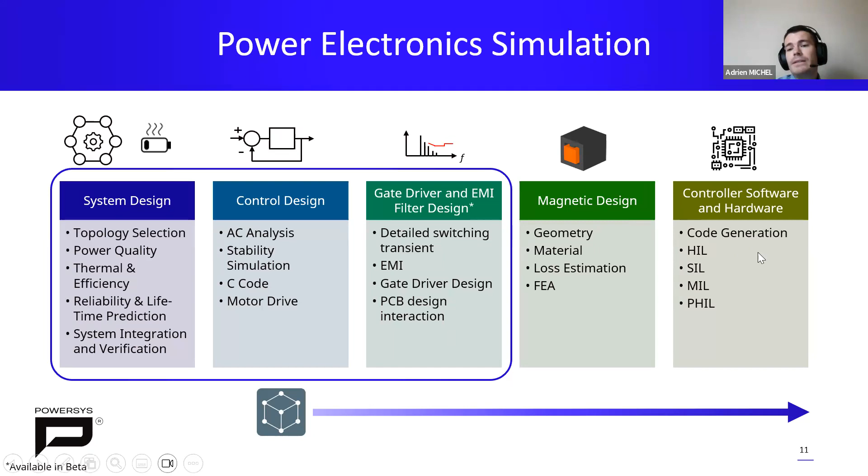But today, if you are focusing on system design, simulate quickly a topology, estimate the losses, the junction temperature, make any control loop, and calculate your EMI filters, you can do that with Simba. And we are good in this kind of process. And finally, we want to cover all, as you can see, the magnetics and this kind of real hardware simulation.

Also, as you may know, we have three ways to use Simba. The first one is to use the desktop version. So this is the graphical user interface that you can see here on the top of the screen. And this is one of the most common uses of Simba. So many people are going to download Simba from our website and they can just download the exe file, the application. You can launch it in your desktop, in your computer, and then you can start to build any circuit from scratch directly. This is the desktop version.

You have also the online version, which is linked to your browser. So you can go on Google and you can have access also to Simba if you want to simulate quickly some topologies as well. And you have the final one, which is one of the most important ones, which is a Python module. Because as you know, we have added the capability to Simba to be used with a Python interface. So it means you can build any circuit from scratch. You can simulate any circuit from Simba in Python. This is the API Python module.

So maybe most of you have already used it in order to perform a lot of powerful simulation, advanced simulation, and you can combine both the use of Simba desktop and Python in order to make a very powerful and amazing system. If you want to make some robust analysis, advanced analysis, if you want to emulate a kind of oscilloscope, if you want to use some predefined algorithm in Python in order to build and to calculate for you any controller, it is possible.

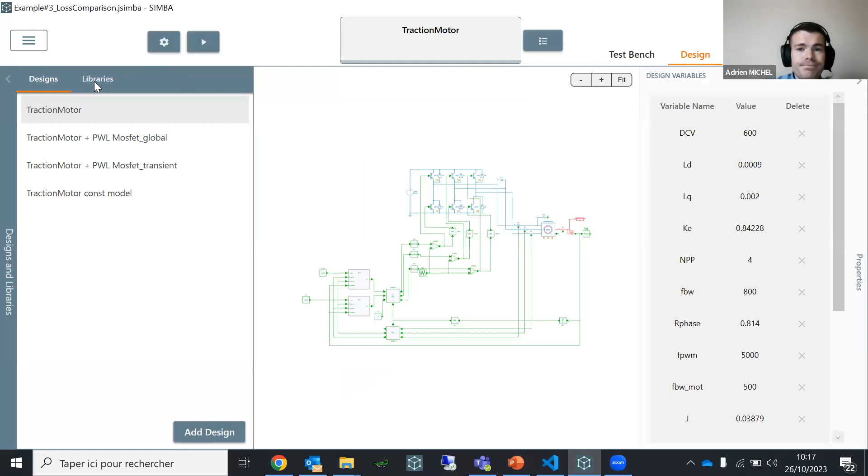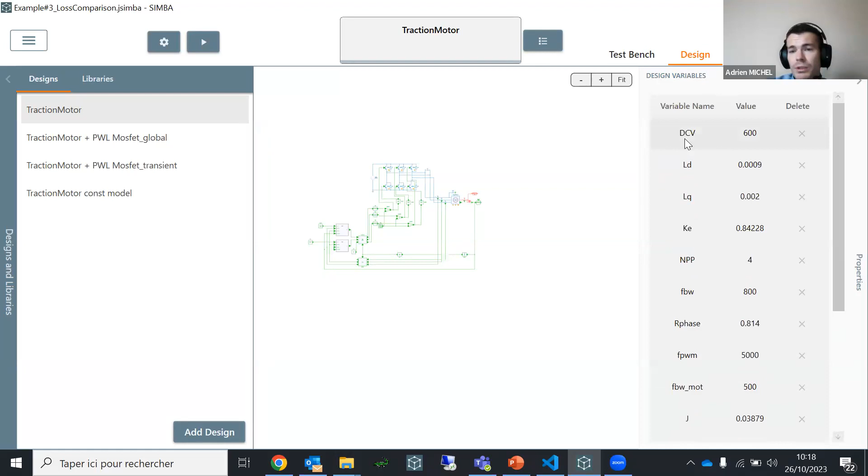Also, we have introduced the capability to use the parameter file as well. So you can now add a kind of txt file, and inside the txt file, you can define any parameters. So as you can see in this example, we have defined all the parameters with the design variable window. So you can introduce DCV, which is the input voltage of your system, and it is 600. But if you don't want to use this kind of panel in Simba, you can directly create a kind of txt file and put the path of this file.

And then Simba will read the file with all the variables defined inside it. Thanks to that, you can maybe make a kind of parametric simulation only by using this file and sweep a lot of different txt files as well. It's possible to do this kind of simulation. So basically, we have just defined variables inside subcircuits to better organize them. Okay.

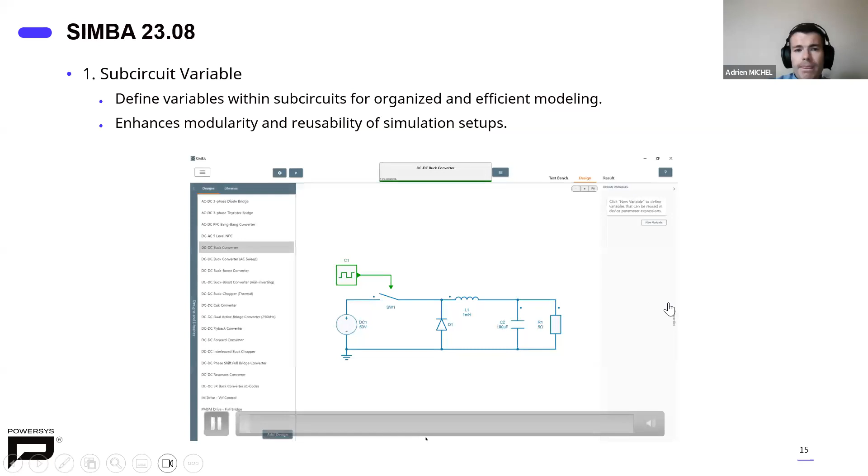Then we have also introduced the link between JMAG and Simba. So maybe most of you are working with mechanical teams because maybe you are focusing on motor drive simulation, and maybe your colleagues use JMAG itself or JMAG Express. This is the online version of JMAG, which is free. You can go on the JMAG website, create an account, and have access to JMAG Express in order to build your own, for example, PMSM and export this RT file, in order to use it later in Simba.

Or you can use JMAG, which is the 3D mechanical simulation software, build your own motor inside it, and use the JMAG-RT tool in order to extract the RT file.

So again, JMAG-RT allows you to build a kind of lookup table in order to take into account, as you can see, the total flux, the inductance value, the torque, the iron losses, and even more parameters could be used inside the JMAG-RT table. So the goal, in fact, is to build your own 3D mechanical super accurate motor in JMAG and to click on one button in order to export the same 3D motor, but it will be in a lookup table, 2D lookup table, as you can see here.

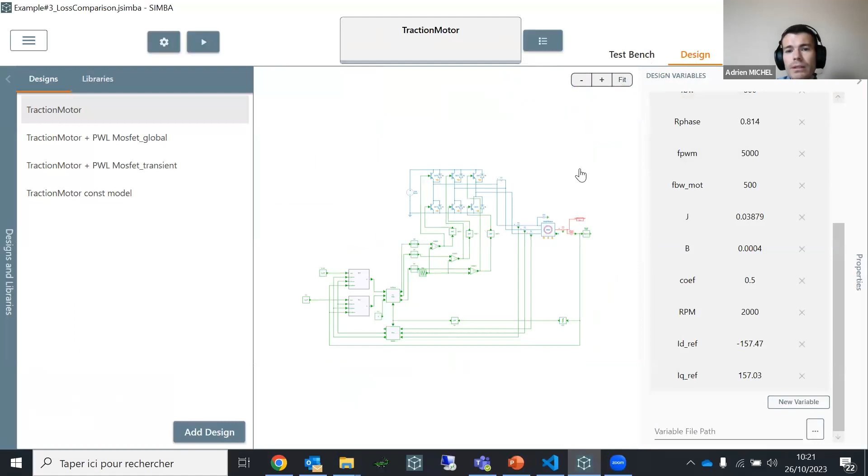So here, this is what I have shown you a few seconds ago. This is the PMSM example that I am talking about. We have just set up one inverter, actually, with an ideal model for now. And also you can compute the losses because we have the capability to compute the losses of your IGBTs directly from the ideal semiconductors model.

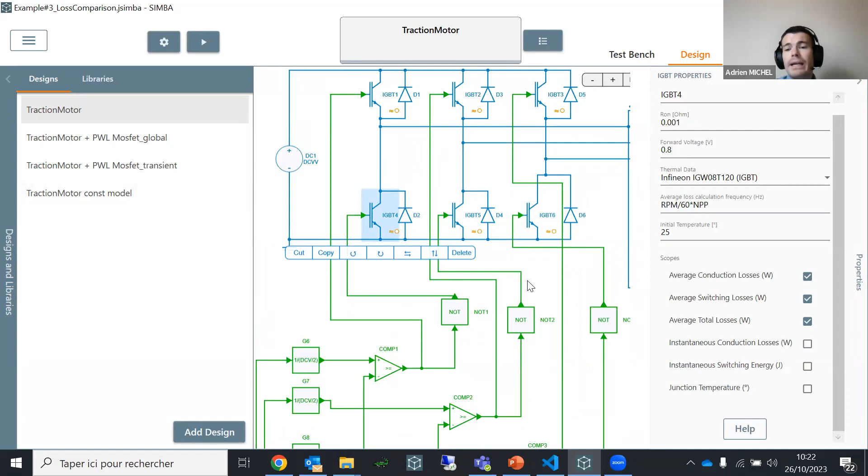Okay. And here, in that case, we have used a motor, a JMAG-RT motor, a PMSM1. And this file is, as you can see, coming from my computer, and this is in fact an RTT file. This is the extension provided by JMAG-RT when you generate your lookup table with real data. And then all the control stage has been done with the ID, IQ reference in order to create VD and VQ signals, and then build your own PWM signal in order to turn on and turn off your semiconductors.

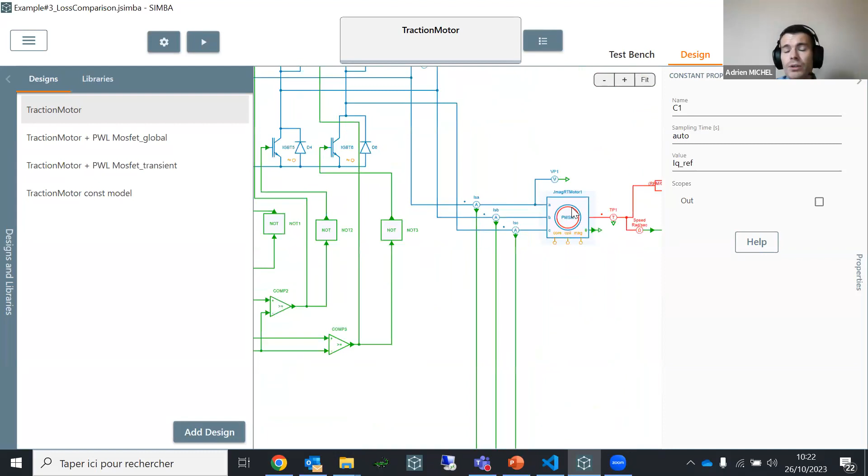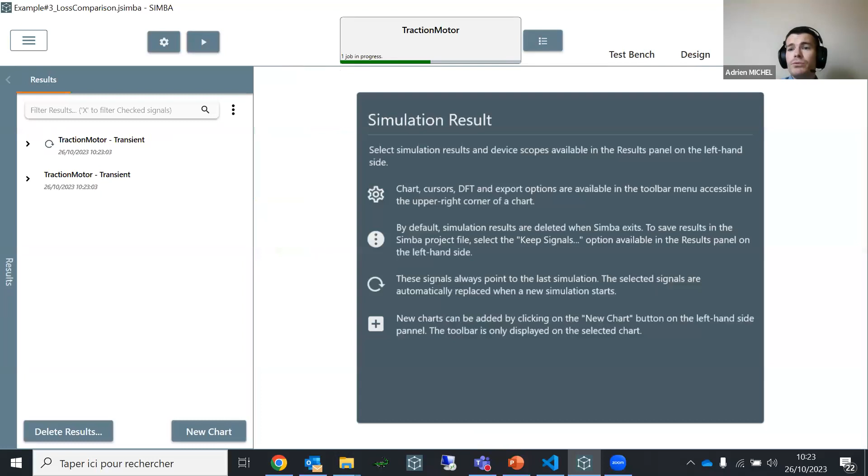Okay, so this is a basic motor drive simulation that you can do, but now you don't need to use an ideal model. You can do that with an ideal PMSM, but now you can use a real JMAG-RT model. And you can click on this simulate button, and as you can see, the simulation is quite fast. And in the meantime, you can go into the result tab and you can observe directly all the scopes which have been enabled during the simulation.

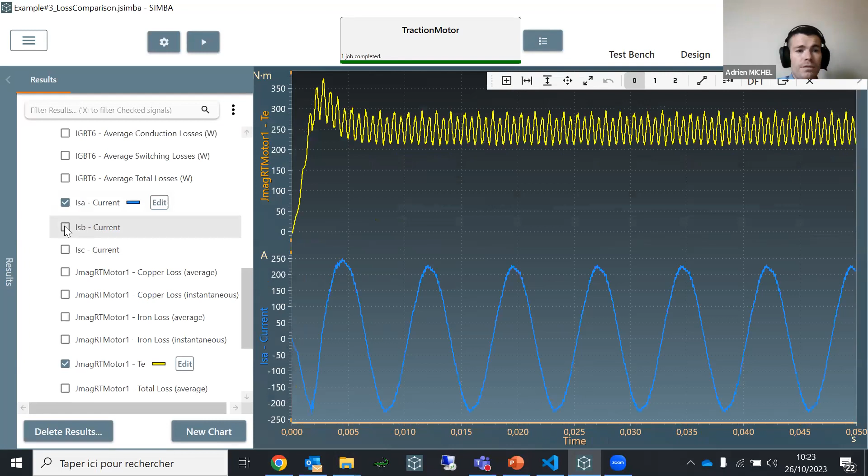So for example, here I can check the torque. Okay, so this is the torque produced by the motor. You can also check the current, three-phase inverter currents, which are feeding the motor directly here. You can also, if you prefer, add a new chart and add the current inside the chart directly here. You can make a quick zoom and understand directly the ripple, the ringing, and so on. Okay, so you can check this kind of behavior.

You can check the torque, and as you can see, the torque has a non-linear behavior. Why? Because the JMAG-RT model is a non-linear one. It is a real model. So of course, the non-linearity will be there. So this is what you can do now with JMAG.

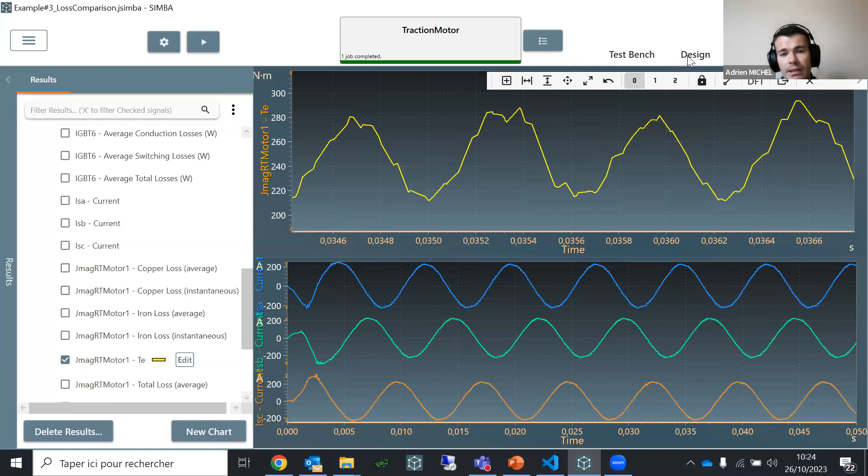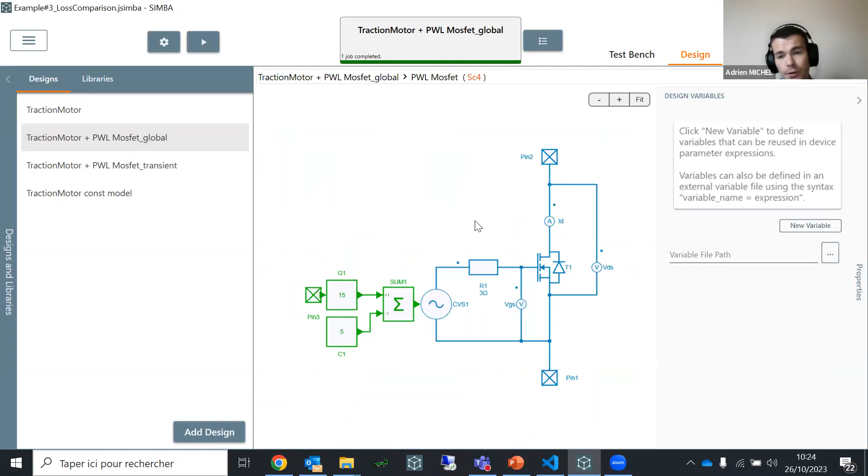And then this is the next step of the webinar, and the main step is to use real semiconductors. And inside the next simulation, this one, I use a real MOSFET in order to get the real behavior of your inverter, and also the real model of your PMSM. So in that case, now you don't need to use the JMAG-RT model with ideal. You can now use a real detailed MOSFET inside Simba plus a real motor model in order to have a full real simulation. And this is the main goal of this simulation.

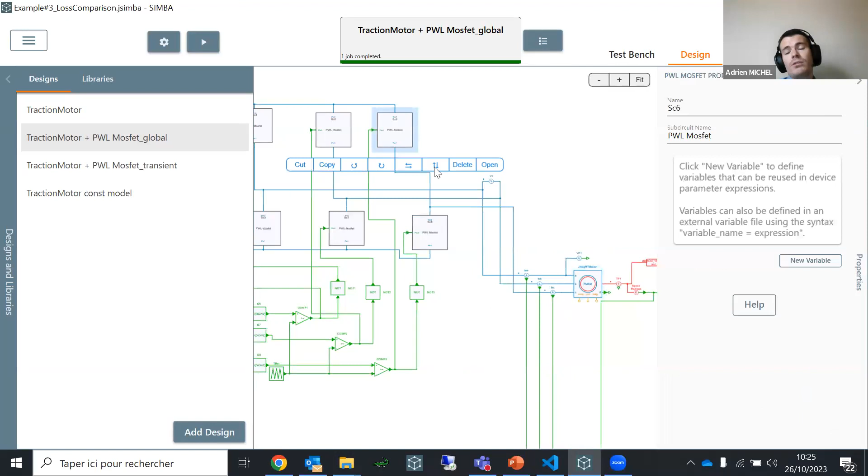But I am going to introduce the real detailed MOSFET soon. But here it was just to show you that it is not restricted to an ideal semiconductor model plus motor. You can do both real semiconductors and real mechanical things. And you can compute the full and total efficiency map of your drive, as you can see on the screen at the bottom here.

Also, one new feature is the capability to compute faster the stop at steady state function. As you know, in Simba, you have the capability to define an end time. Okay, so maybe you want to simulate maybe 50 milliseconds.

But if you don't know how much time it will take to simulate, in that case, you can click on this handy button, stop at steady state, which was already created a few years ago. Okay, this stop at steady state is not a new feature, it was already there. And the simulation will stop itself when the steady state is detected. In that case, you don't need to take care about which end time you need to put.

But the new features which have been added are the base frequency, the number of base periods, and the save initial point. So, for example, if you use the base period, these parameters will help the algorithm to detect easily and in a faster way the stop at steady state. I will show you that.

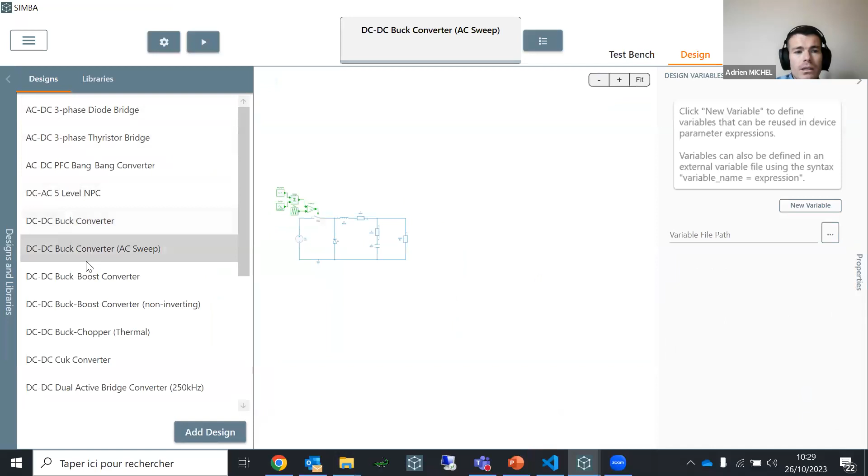So I can show you quickly one example. So I can just click on Start window. It will just open a new welcome page of Simba. You can click on Design Example. You can click on Buck like this. You can see you can simulate during 20 milliseconds. You can check the output voltage, which is directly here.

You can decide now to stop the simulation at steady state. In that case, as you can see, it is not 20 milliseconds. Okay, so you can directly retrieve the first simulation, which was the 20 milliseconds. Now this is with the stop at steady state, and the switching frequency of my buck is 5K. So you can decide to set, okay, the base frequency to 5K or 5,000, let's say, it's the same.

And now, as you can see, we have the new simulation time, which has been directly provided here. Okay, and basically you can also provide maybe the three last periods to observe, and now you can simulate, and you can see now the three last periods of your system.

Okay, so if you don't put that, in that case, you can just put it like this, and you will see that with the 5K frequency, the steady state has been detected at this point. And this point was just with the first 20 milliseconds. Okay, so if you use these parameters, it will just help the system to find the steady state sooner.

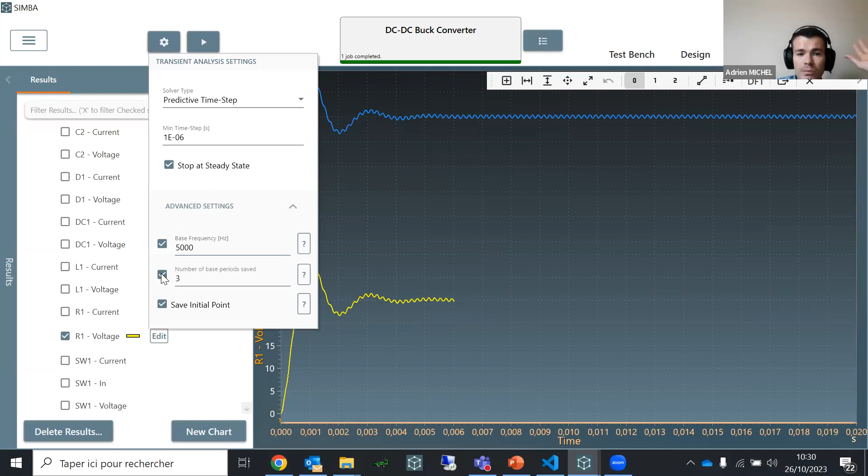And if you want to display only the three last periods, like this, in that case, I can just stop. And here you can see the three last periods of your steady state.

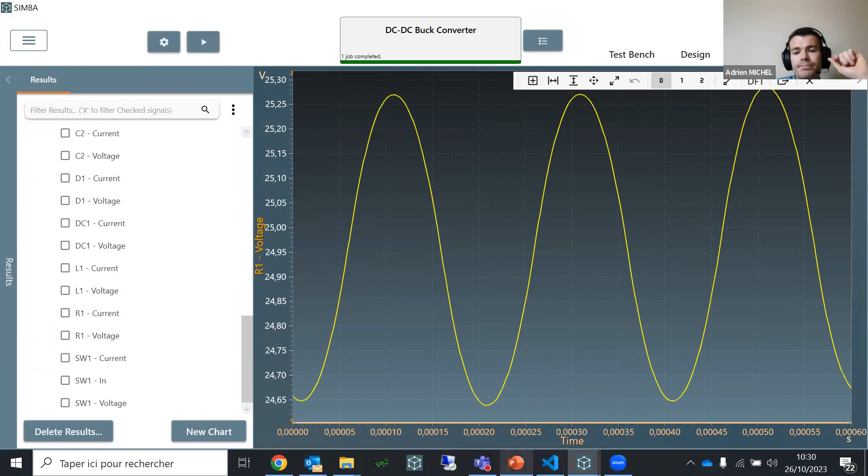And we have also added some very interesting functions, like if you want to use drag and drop, you don't need to click on plus. When you select your component, you can just drag and drop it. If you double click on any of your jsimba files, Simba will be opened automatically. So the association between Simba and the jsimba project file has been done.

We have an auto backup function. It means if your computer crashes for any reason, you can just retrieve your last simulation with the last parameters that you have configured. So you will not lose everything, basically. And we have added a lot of new blocks, as you can see here, if you want to, again, perform more simulations.

And the main milestone, the main topic of this new release, is the release of new detailed diode and MOSFET models for switching transient behavior. So the goal, in fact, is to be as accurate as possible to reality. So based on that, we think that the datasheet of the manufacturer who provides any semiconductors is in fact what we need to rely on in order to make something accurate.

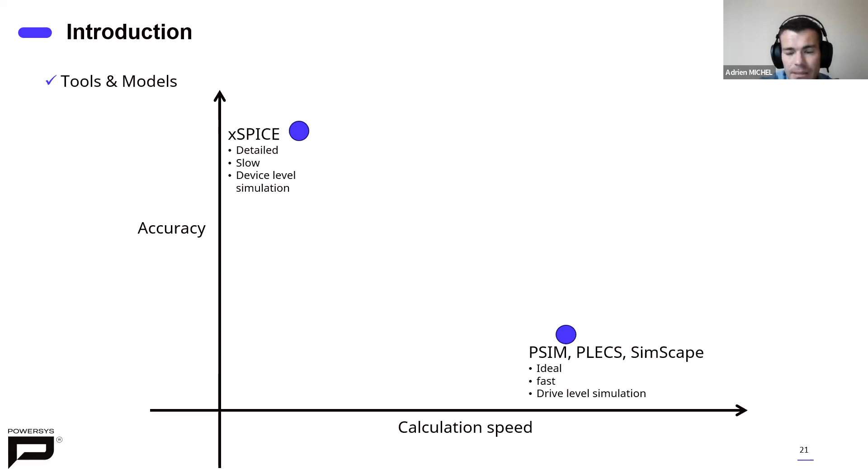But sometimes if you want to go fast and you don't care so much about a real model, you can use an ideal or quasi-ideal simulation software like PSIM, PLECS, Simscape, and some others. So this trade-off, in fact, is a real pain for you because each time you need to use two simulation software. You need to reproduce one circuit from one software into another one. It will take some time. It can also lead to some human errors or to some issues between each solver. And at the end, it is not really convenient to work in two different software.

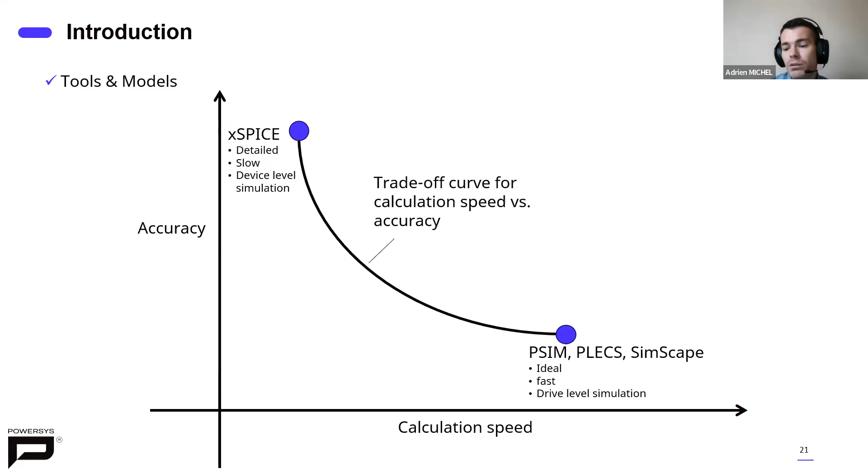Also, if you have a big team and everyone needs to work in two simulation software, it is completely not convenient. And our goal with SIMBA is to combine both accuracy and calculation speed. So actually, you can use SIMBA for ideal simulation, for system level simulation, and it will use ideal models. And you can use, of course, thermal data, thermal lookup tables that you can import directly from the semiconductor manufacturer. But now you can use our detailed model. It is called SPICE-like, a detailed model in order to be as accurate as possible as SPICE.

So again, SPICE is not always accurate. And this is why we have added two possibilities. One is to use the datasheet information, to scan the datasheet in order to represent the real transient and static behavior. And the other is to use SPICE netlist models inside SIMBA. And it is SPICE-like because we have built an algorithm in order to reuse and recalculate SPICE netlist parameters inside SIMBA in order to be as accurate as possible as SPICE.

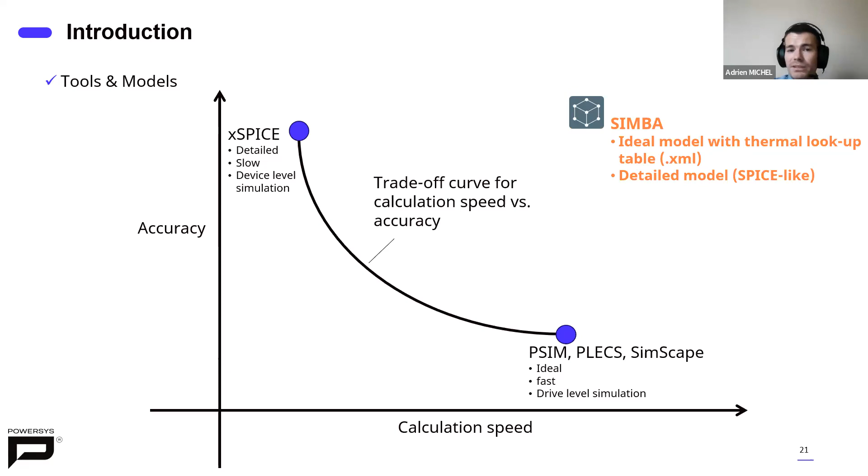So now SIMBA combines both device level simulation and system level simulation. And this is what we have done for this new semiconductor model. So the goal is to capture the switching and the static characteristics with a precise, super fast, and ideal model, and they are used, in fact, in extensive iterative calculation. For example, if you want to use Python, you can sweep 1,000 semiconductors and check the influence of the parameters on your simulation.

And again, everything will always be with the same solver. You don't have to change between SIMBA solver or SPICE solver. It is not working like this. It is always the SIMBA solver, but the way we have built those models will be really, really fast. And I am going to show you this. So the process is quite easy.

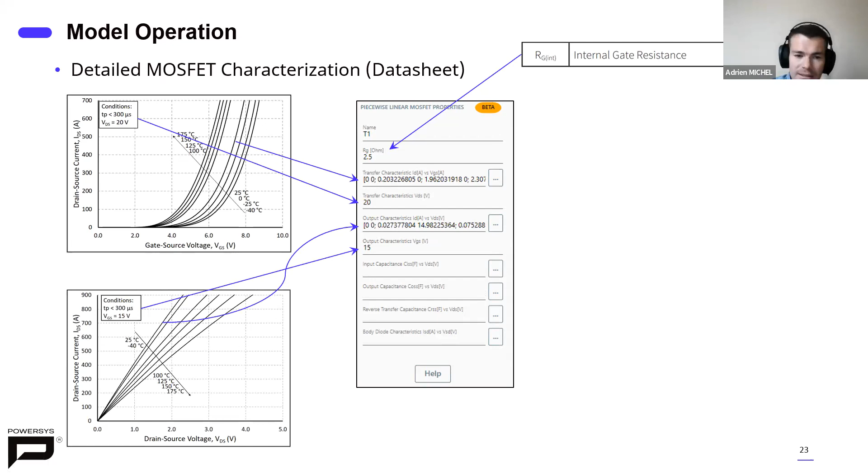For the MOSFET, you need to fill in the gate resistance value. So you can just open the datasheet and get the value. Then you need to put the transfer characteristic, for example, ID versus VGS, at one transfer characteristic value, for example, for VDS equal to 20. Then you also need to put one output characteristic, ID versus VDS, for one VGS value. You can choose any VGS value and any output characteristic, but only one needs to be filled in inside the table here. And then SIMBA will do all the process for you.

You need to put also the nonlinear capacitance, you know, CISS, COSS, and CRSS versus VDS, those typical curves. You can just scan it or import a CSV file. And the last one is the body diode that you need to fill in, the body diode curve, as you can see in the fourth quadrant.

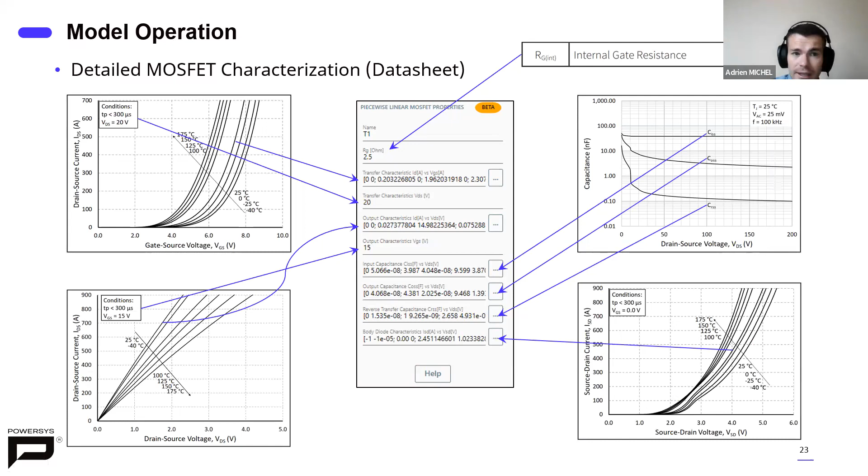Once you have done that, your detailed model is characterized, and you can start to run it. And here you can check the internal model of our detailed MOSFET. We have introduced some nonlinear capacitance. We have also introduced a body diode, a real detailed diode as well. We have put the gate resistance. You can see here the nonlinear capacitance, the mathematics.

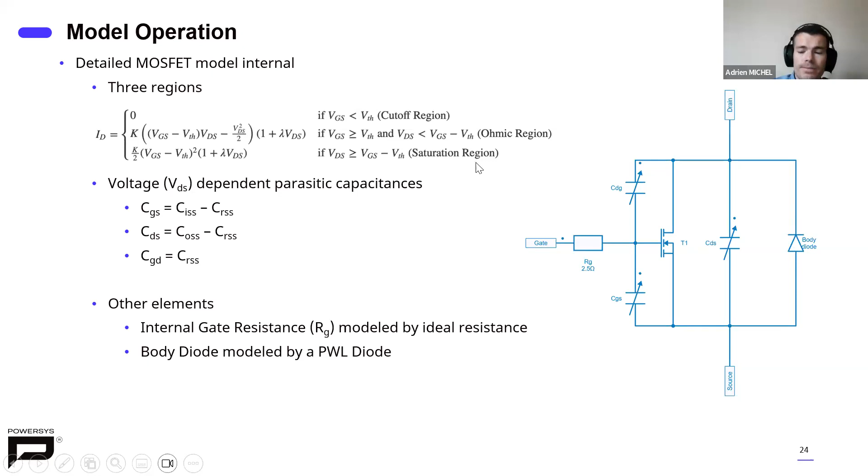And here, this is the inherent calculation of the MOSFET in cutoff region, ohmic region, and saturation. We have built and used a kind of algorithm which can help you detect the main MOSFET channel parameters in order to calculate automatically those three parameters, VTH, K, and lambda. And then Simba will use those parameters to compute the switching and the transient behavior.

And as you may know, those parameters are most of the time used in SPICE as well. So we can also extract those parameters from SPICE and put them inside Simba in order to reproduce the same behavior as SPICE. So basically, you have the choice to use the MOSFET model from the datasheet. You just need to use those characteristics, and Simba will do it. We do everything automatically.

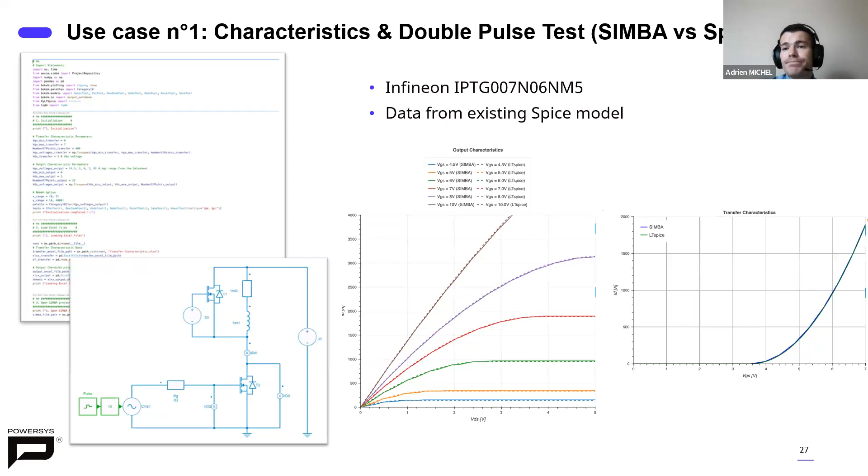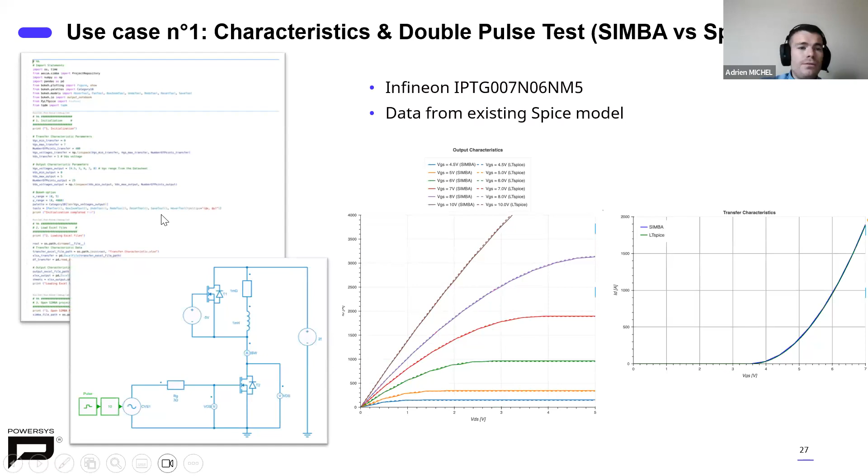So if, for example, you want to use a SPICE model, and you use one SPICE simulation software and another simulation software for your system level simulation, and you think it is really a pain to reproduce everything in two different simulation software and lose time, you will need to use Simba, because Simba will do that for you.

So I can directly open the Python script, because Simba is compatible with Python. We have built this Python script, which is not too long, only 200 lines. If you run this script step by step, we compute and simulate this double pulse test. The Simba simulation will be done automatically. It will be initialized. We also import some datasheet values, and we merge both results, one from Simba and one from the datasheet. I think it takes some time because I am in Zoom.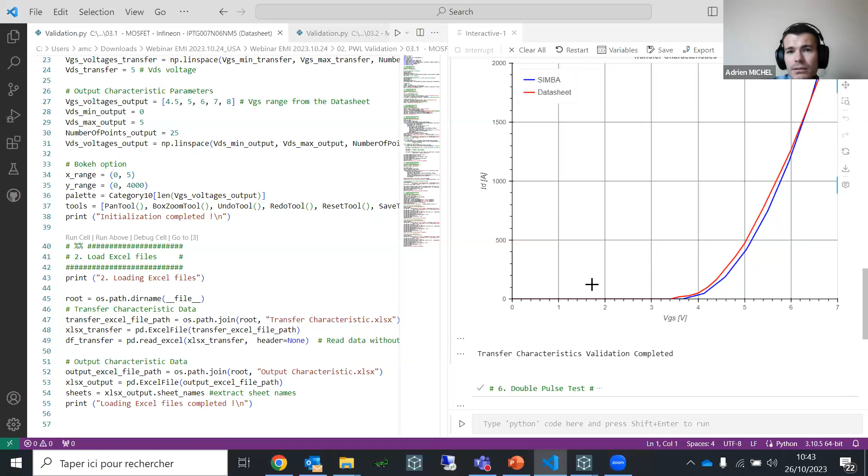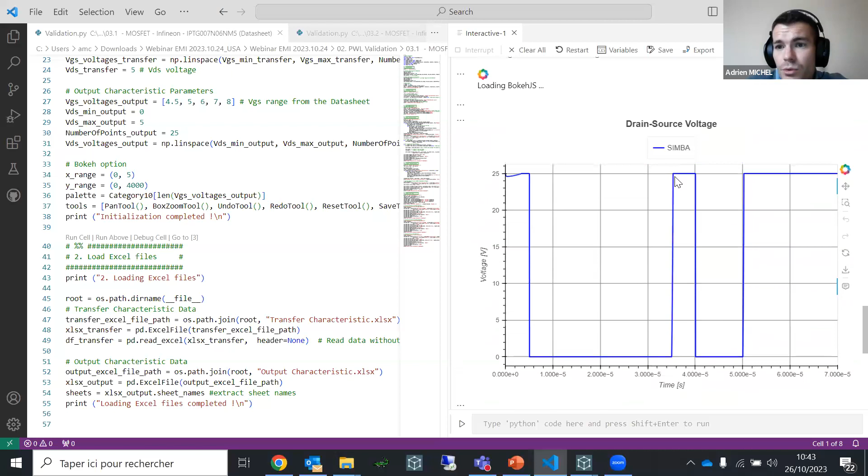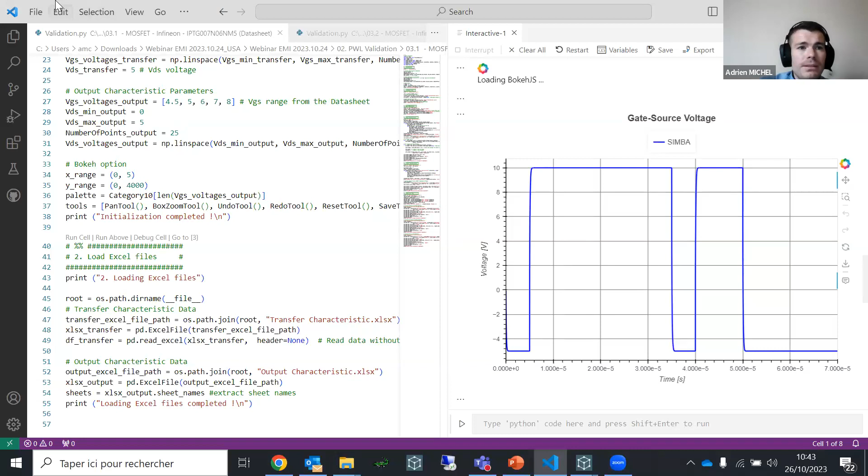It will show you the rest. It takes just a few seconds. And here you can see the drain current, the drain source voltage and the gate source voltage, the result of the double pulse test. And now I can close this interactive window and resimulate the same thing.

Okay, yeah, between Simba, because we have introduced the SPICE detailed model with the SPICE VDMOS features. And we are going to compare this new model versus SPICE simulation. So again, we have run the LT-SPICE simulation. We have exported the result because you can use the LT-SPICE library in Python. You can use our Simba Python library, and you can combine both in order to compute, and as you can see, we have set up 900 simulations in less than 13 seconds. So with Python, it is extremely fast.

And you can see now the result between Simba, this is the solid curve, and the dashed curve, which is the LT-SPICE. So as you can see, we are matching perfectly. We have the same characteristics, ID versus VGS, it is the same. So I can zoom, click on this zoom, and you can see the results, which are very, very close.

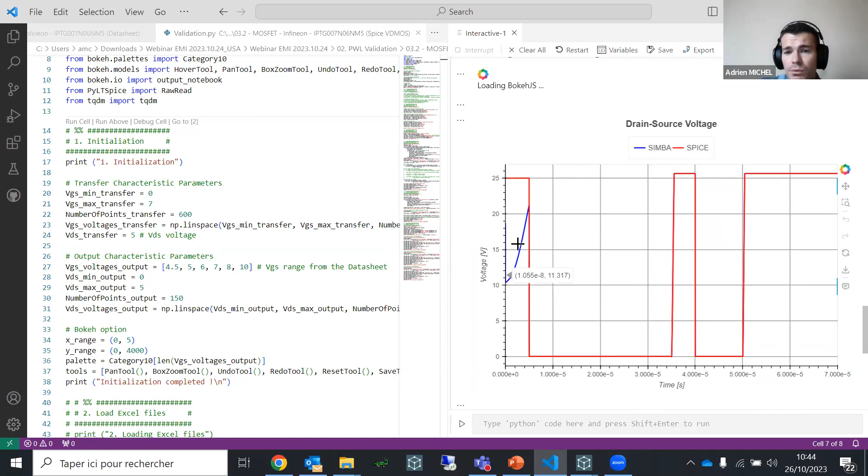You can see the gate voltage, the drain source voltage again. So here we have just made a different initialization. This is why we have different values here, just for the initialization. And the drain current as well, which are very much the same. I need to zoom, and you can see the result between both.

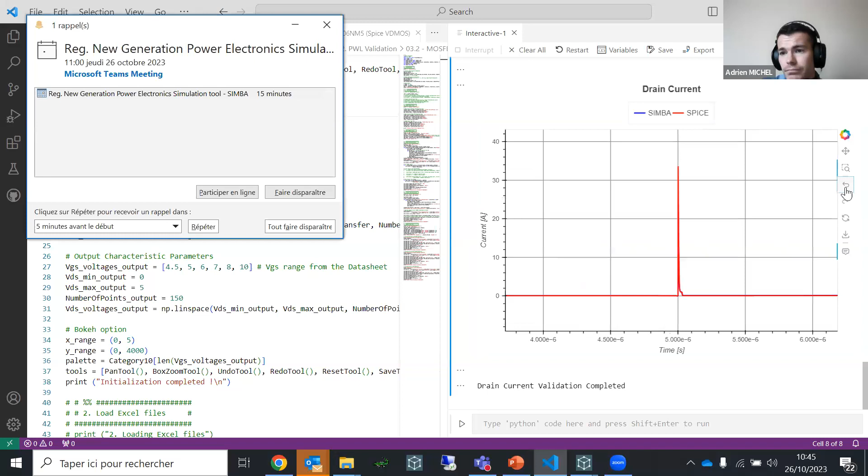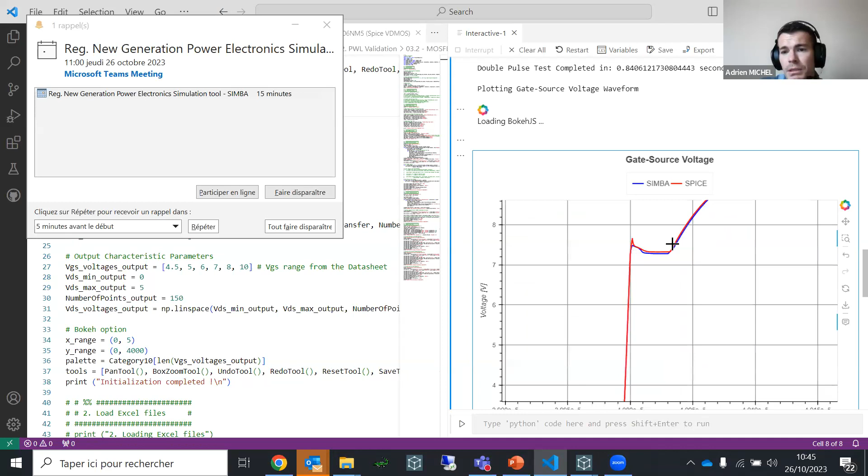And one thing I forgot is to show you the Miller plateau, which is just there. And you can see now the Miller plateau between Simba and SPICE with our new detailed model based on SPICE parameters. So basically, you have the choice to use a detailed MOSFET based on the datasheet, which will give you the same accuracy as the datasheet, or if you prefer to rely on a SPICE model because you work with SPICE, in that case, you can use our SPICE VDMOS.

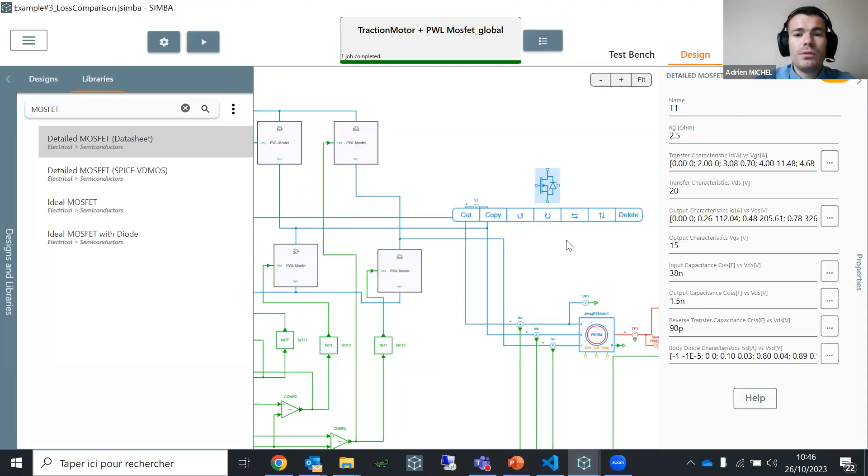And this result is, in fact, what I have shown you just there in this Python script. And the first Python script was the same simulation, but we used this detailed MOSFET based on the datasheet where you need to scan all the characteristics: non-linear capacitance, ID, VGS, VDS, and so on. So now you can use Simba for this kind of real simulation if you want, or you can use it also for system level simulation as well. You have both capabilities.

So now I am going to give the ball to my colleague Anup. Then he can introduce you the other test case that we have done in order to show you how it works. So Anup, I will just stop sharing my screen and you can continue. Thank you, Adrien. So I'll share my screen.

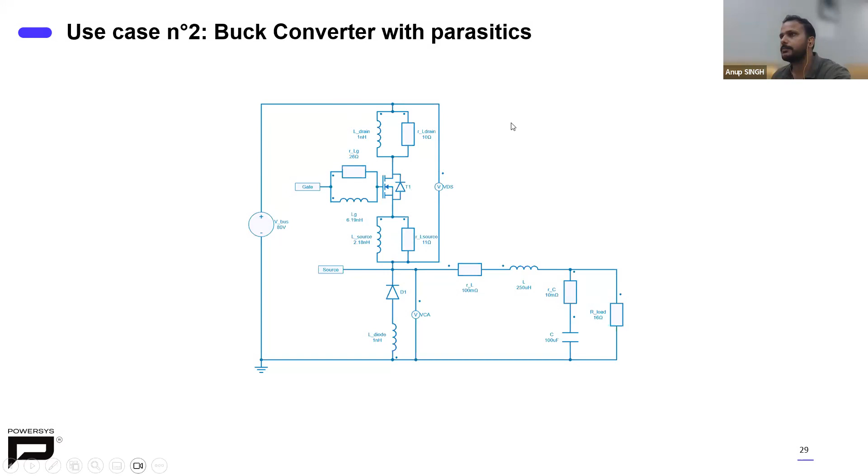Okay, I'll brief you about the two test cases on which I have used the detailed models. The first one is the buck converter. So I'll directly open the model to show how you can model using the detailed device. So here you can see this is a buck converter, which is first made with ideal components, and then we have introduced some parasitics into this, and this is also with ideal semiconductor models. Then after that, here I have replaced the models with the detailed models. Actually, this example was done by my colleague Carol in the US.

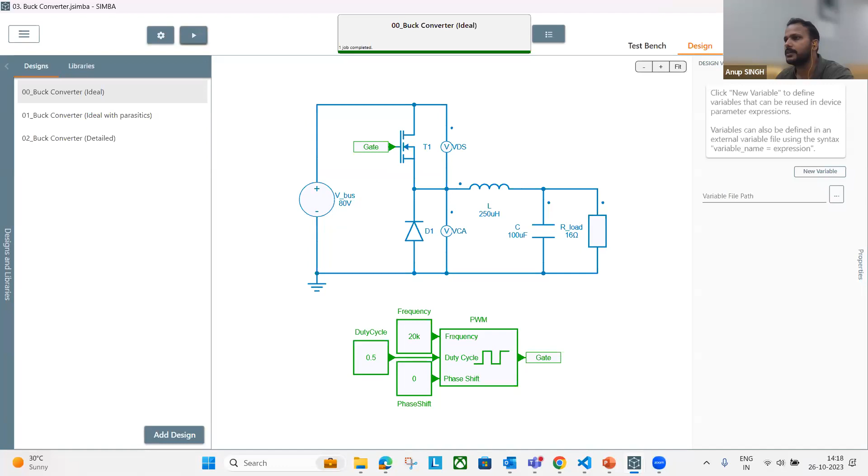So yeah, this is done. So I'll just simulate these models and we can see the difference directly. So you can see this is completed. So here you can see the ideal model. I'll look into the inductor current and then VDS. So here you can see, first of all, it is in DCM till it gets stabilized, and then into continuous conduction mode. Okay, so this is with all the ideal switches.

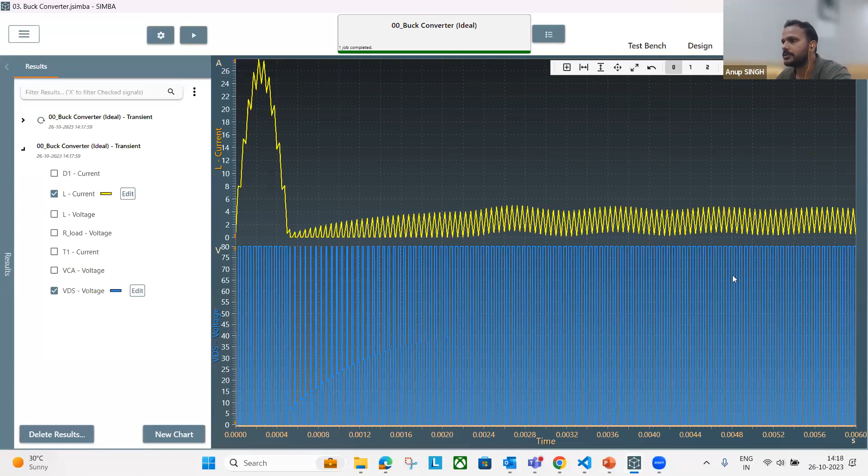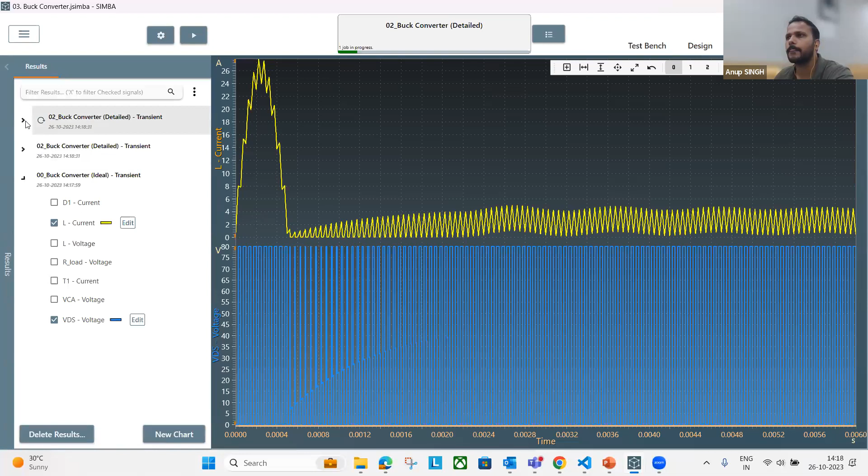Now I'll just run this buck converter with the detailed model. Okay, so if I run this, wait, yep. So I'll take a new window. VDS, yes. So here you can see, till it is in discontinuous mode, if I zoom it, okay. And then here you can see the ringing effect very well, which is due to the parasitics that you have added and the detailed device models.

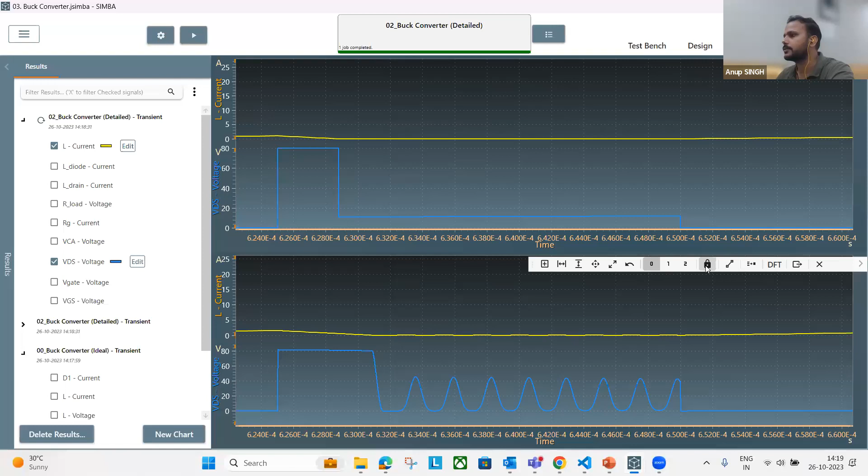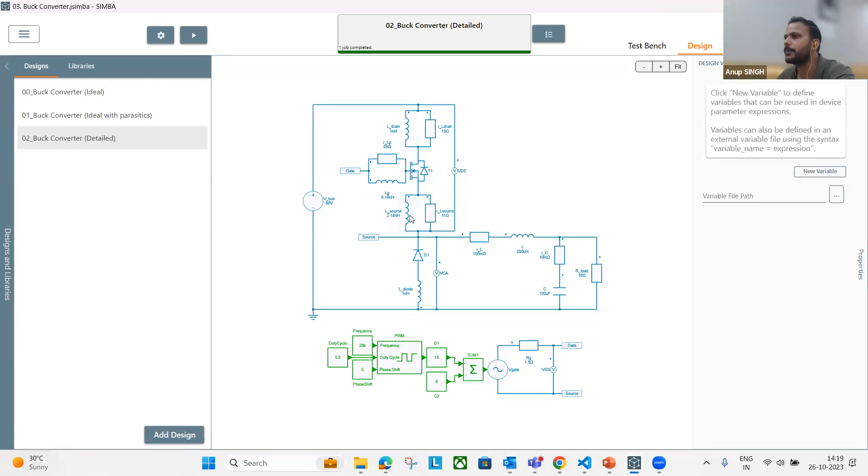Okay. So then after this, further you can see also the ringing effect here, if I zoom in. So using the ideal model, you don't see any ringing effect. And with detailed models, you can see the ringing because in the design itself it becomes a second order circuit. You can model a lead inductance, and inside, the capacitance parasitics will be there. And then there is some resistance to damp that oscillation.

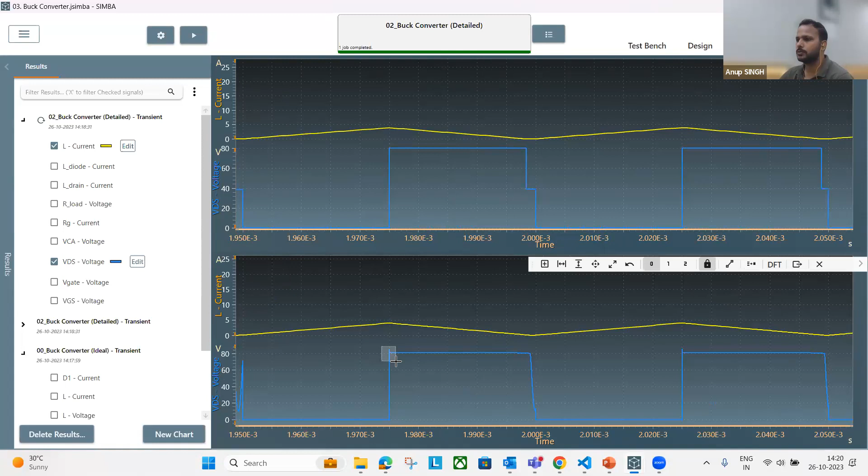So further, your device selection and all these things will depend on this ringing effect. If it is more, you need to put an extra snubber circuit, which is nothing but a way to damp these oscillations. Okay, so in this way, detailed device models will be helpful for you. So generally, you don't need to go to another software for detailed models and another for system level simulation. You can do everything right here in Simba. Okay, so if you look at the steady state output voltage, here you can see this.

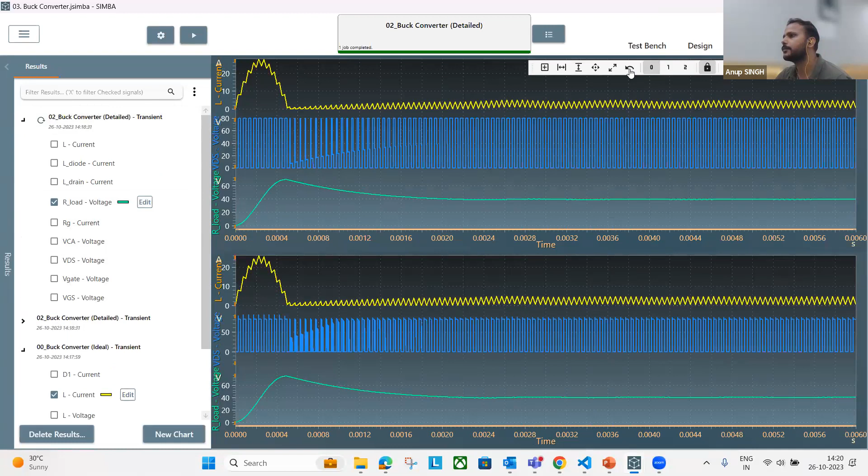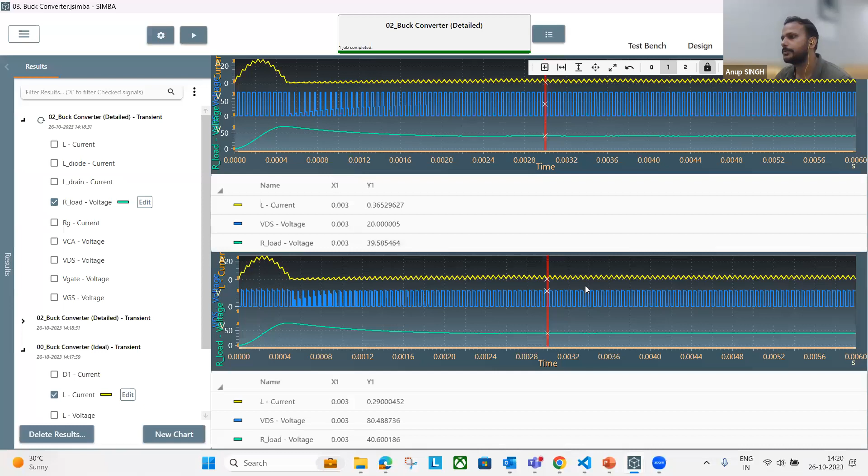Yeah, so here 39.5 volts and this 40 volts. So although it is almost the same, since it is in open loop, otherwise you would have got the same results. Okay. So this example that we have made is using these detailed semiconductor models,

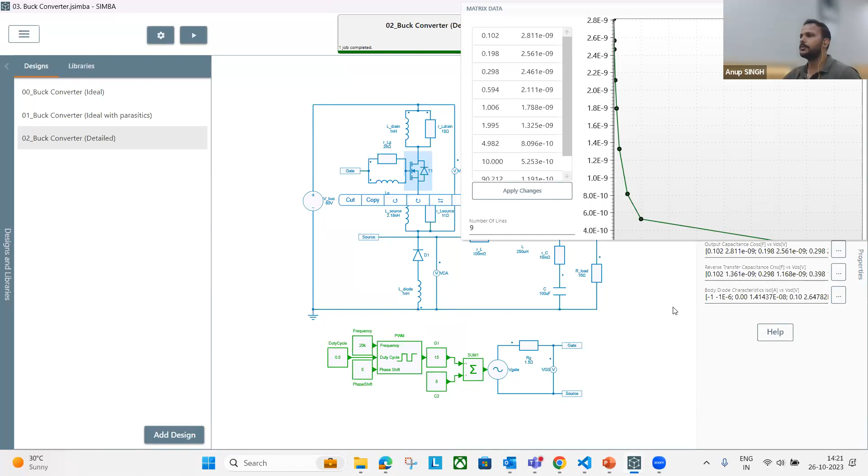what Adrian has explained. Generally, whatever curves you provide here, based on this there is a curve fitting algorithm fitted into the simulation engine, and then it detects the three channel characteristics values, that is K, lambda, and Vth. So once it gets those values, it can calculate and give you the value in three

regions. The three regions are saturation, ohmic, and cutoff region. So it detects in which region it is operating, and then based on those channel parameters, it calculates and gives you the values. So it is pretty fast, as you can see.

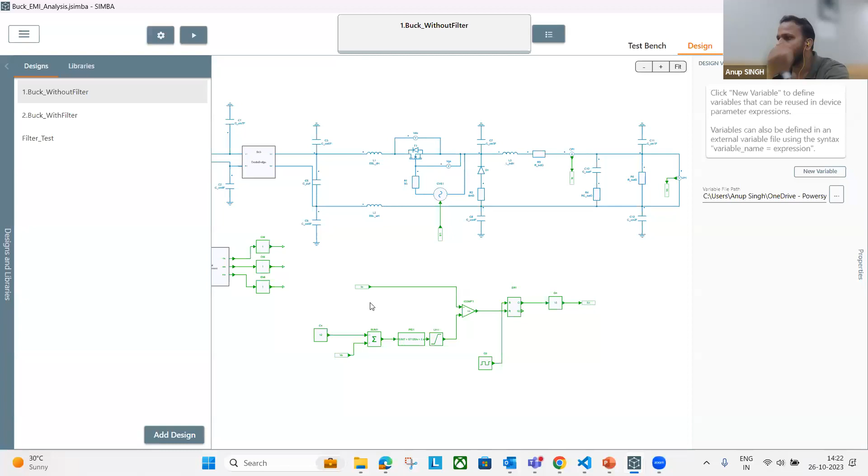So the next use case that I want to show you is about EMI analysis. You can perform EMI analysis as well using these detailed device models. So this is the buck converter, which is somewhat different from the previous one. Here I have added a few parasitics, lead inductance for the drain. And this is in closed loop, with peak current mode control. This example I have developed.

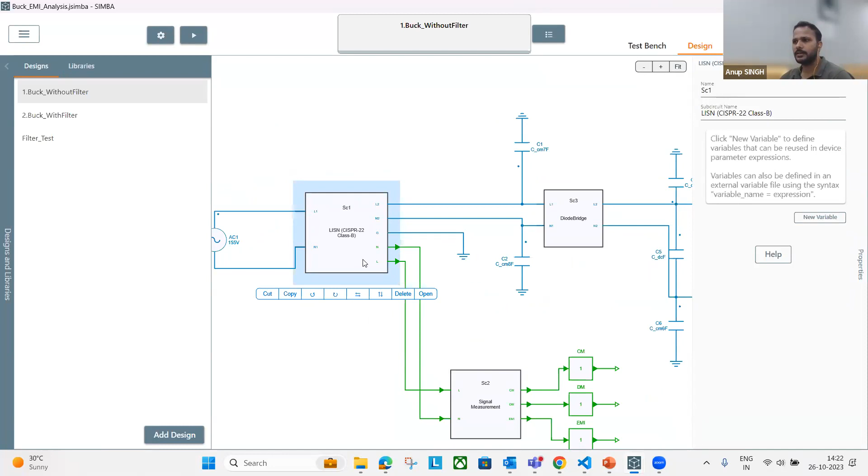To do the EMI analysis, you need basically three things. The first one is the detailed device models. The second is the LISN block to measure the EMI, at whatever standard you want to measure, so the LISN has to be built. And the third one is the signal measurement. Once you get the signal from the LISN, how you identify the common mode, the differential mode noise, and the EMI noise.

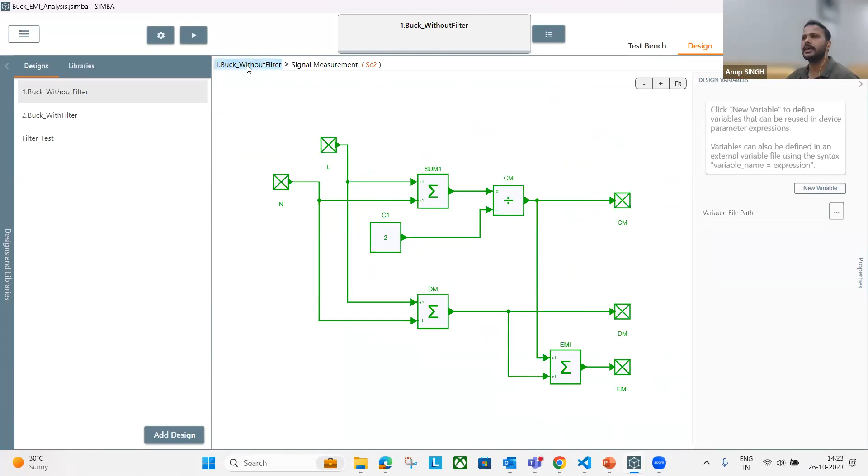The LISN is just using this kind of filter. You put one filter in the line and the neutral, and then you take the signal out for the measurements. Then here you can see the signal measurements. If you go to fundamentals, you will know how the common mode noise and the differential mode signals can be extracted. This is just mathematical calculations.

To view the analysis in detail, again I'll use the Python module, as our software supports Python interfacing. So I'll open this Python one. First I'll run this script, which is without filter. We can wait for the simulation to run. It will take around 15 to 20 seconds, and then we can see the affected curves.

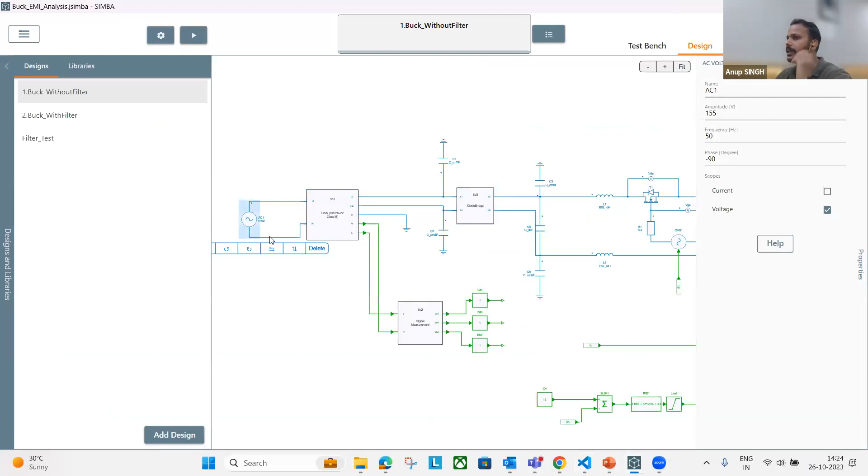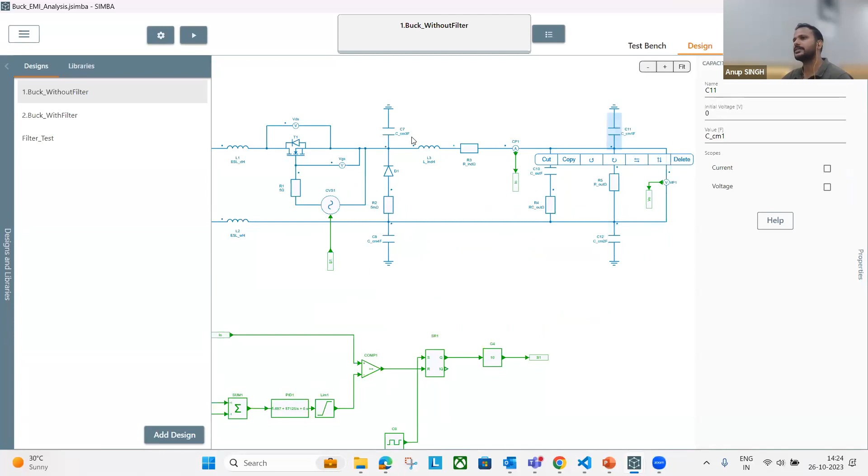Here, one more thing. This is put between the direct LISN. I'm measuring for the AC input signal. From here the signal is going, then I'm using a diode bridge to rectify the signal, then this DC link capacitor, and then it is supplying the buck converter. And these capacitors are the parasitics, the common mode capacitors, which are maybe in between these two, and this is the chassis ground.

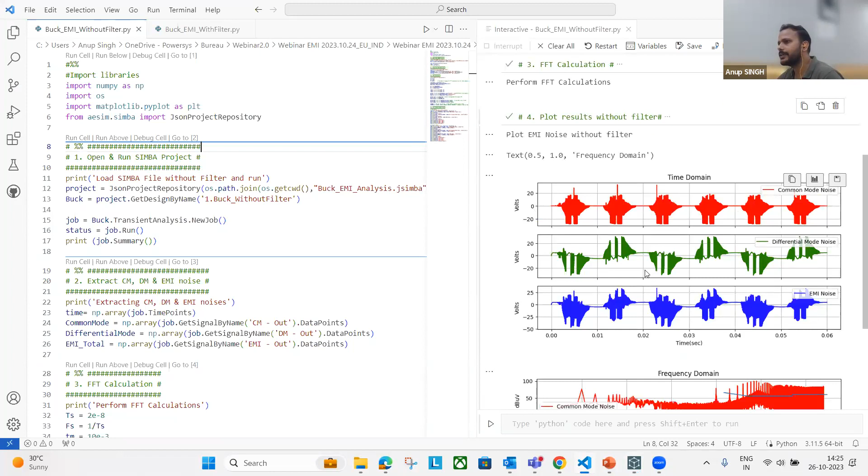So these are modeled. I have used around 11 common mode capacitors to replicate how it can behave to generate the common mode noise. Okay, so here you can see the time domain result: the common mode noise, differential mode noise, and EMI noise in time domain.

And if you convert this into frequency domain, you can see the CISPR22 standard. As you can see, it is crossing the limit. So you can say that this buck converter is not compatible with the CISPR22 standard. So now you need to design an EMI filter which can suppress this noise and stay within the CISPR22 limits.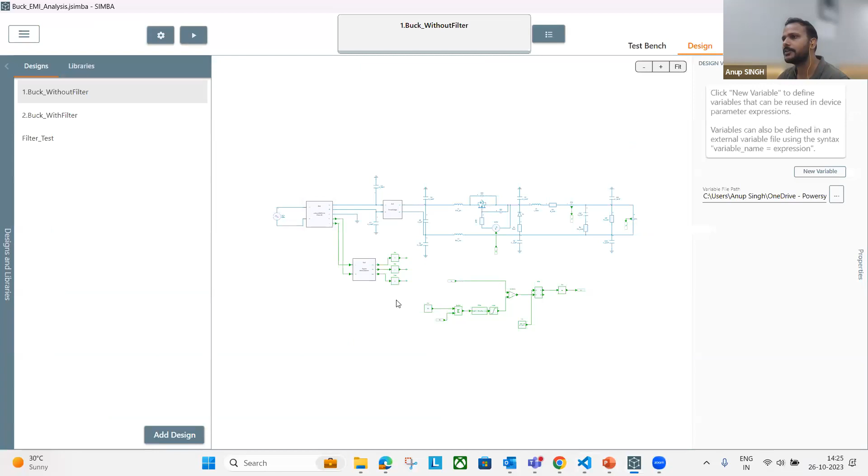Okay, so for that you need to design an EMI filter. So I have designed one simple EMI filter which is of L type. You can say L type filter. So this is the filter that you can design. So here you can see three things are important in this EMI filter.

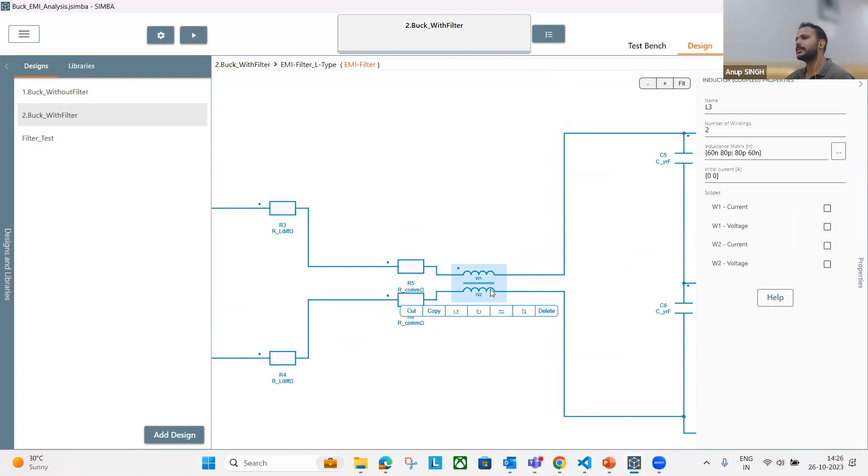The first one is the X-rated capacitor, which is generally connected between line to neutral. And then there's this common mode choke. So I have modeled the common mode choke using coupled inductor, which is available in Simba. And then the Y-rated capacitor, which is generally connected between the line or neutral to the chassis ground. Okay, so you can tune these three parameters.

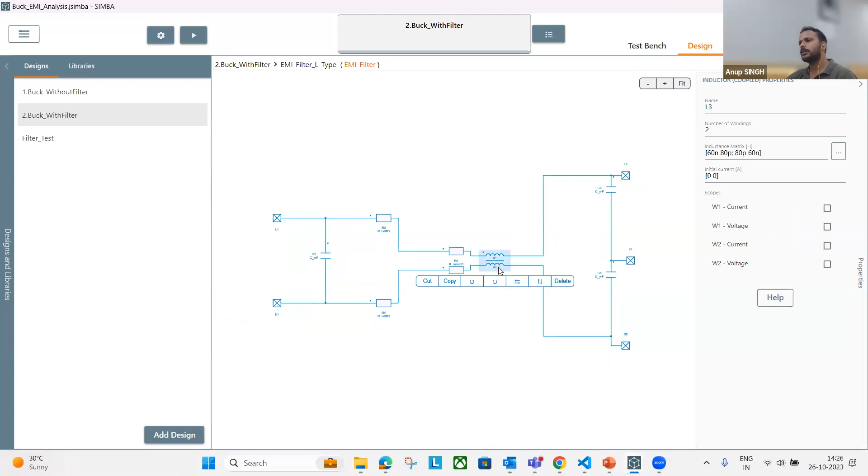So this value, the common mode values, and then again capacitor. So generally these X-rated capacitors you can tune to reduce the differential mode noise. Common mode choke and the common mode capacitors you can tune to reduce the common mode noise. This is one simple example using L-type filter. So based on the complexity of your models, you can use various different types of filters.

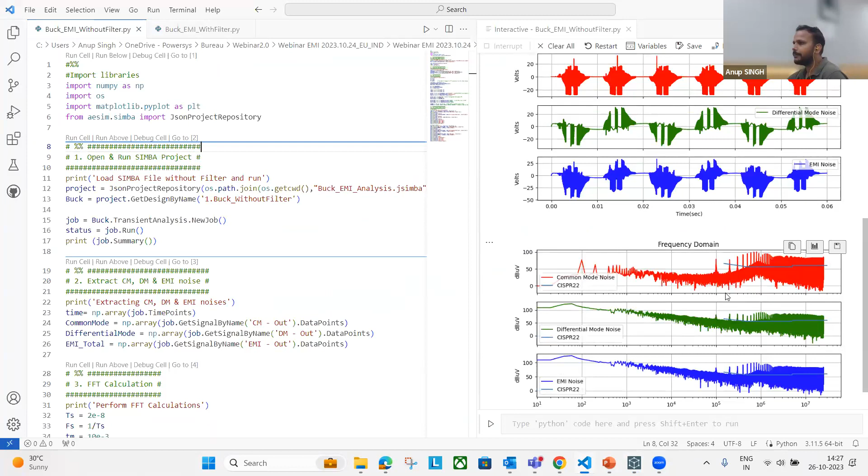So that also, the filter design, you can see here. So at what limit, at what frequency, how much dB it is crossing. So you can note down that particular dB, and then you can take those values. You can write the equations, and to attenuate those, how much coefficients are needed for that particular type of filter.

You may require the filter, maybe not. You may need more than one filter in series, two or three filters. So it depends on what is your modeling, what is your complexity, what is your needs, and what standards you need to mitigate.

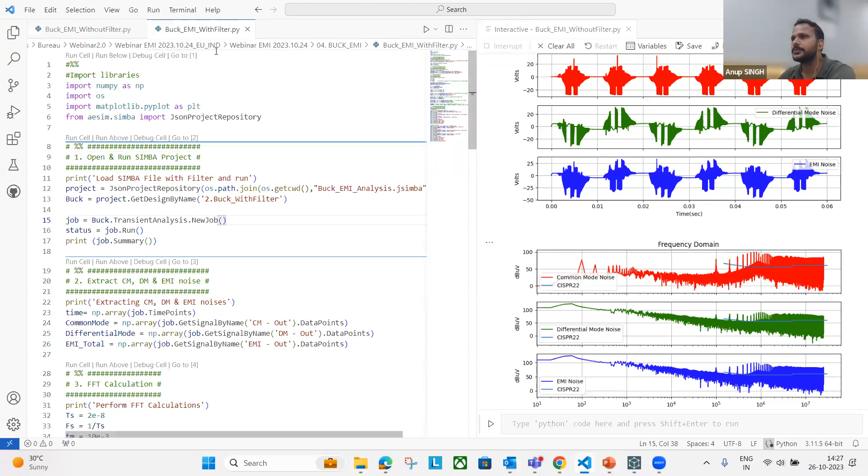Okay. So now next, after designing this filter, I'll just use this buck EMI with filter. Once I have done this, here it will be run in a different window. Okay, so regarding the script, I have done everything here in the GUI. I have made the model. And here also you can run it, no issues, but you can take the signals in Python domain and you can do the post processing. So that's what I have done here.

And in the script, this is the Python library that we are using, and this matplotlib to plot the results, and NumPy to do some mathematical calculations. So what calculations have I done? So here I have taken the signals. I'm performing the FFT on the signal data that I have. So I'm using NumPy to compute the FFT on the signals.

And here, since this is the EMI analysis, I need to look at the results in dB microvolts. So I just changed the scale of the y-axis to dB microvolts, and then I added the CISPR22 standards, and then you can plot the results. Okay, so here you can see. After filter design, you can see the results in time domain. You can clearly see the difference.

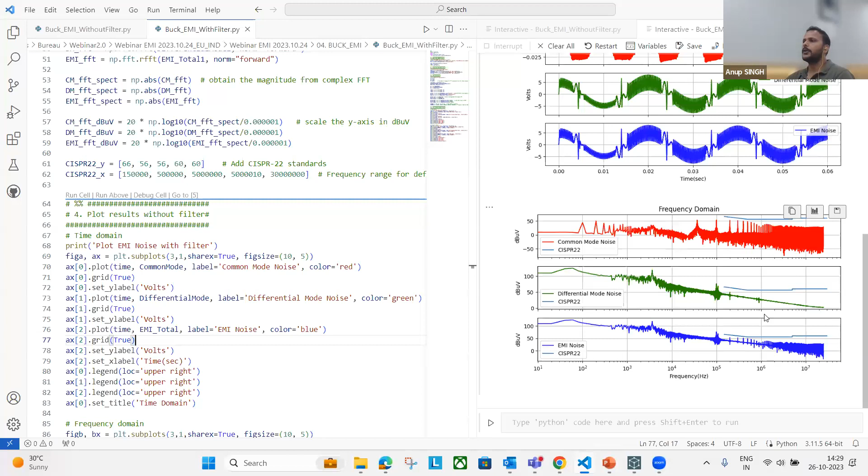And then in frequency domain, if you calculate the FFT on those particular signals, you can see these noise are well within the limits. Okay, so after designing that simple L-type filter on that particular buck converter, now you are able to mitigate those noise. And now you can say the designed filter is as per the EMI standards. What standard? It is CISPR22.

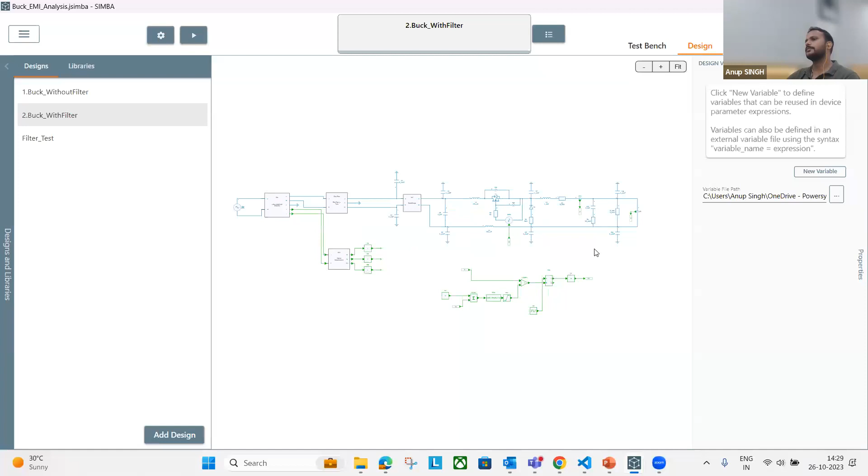So in the same way, you can perform the analysis for various standards. You can do various other things. So all this is possible because of the models here, as you can see. Other things are based on linear elements and mathematical calculations that you can do by yourself. Okay, so this is how you can do various analysis using new features that we have developed and came up with in the 23 version.

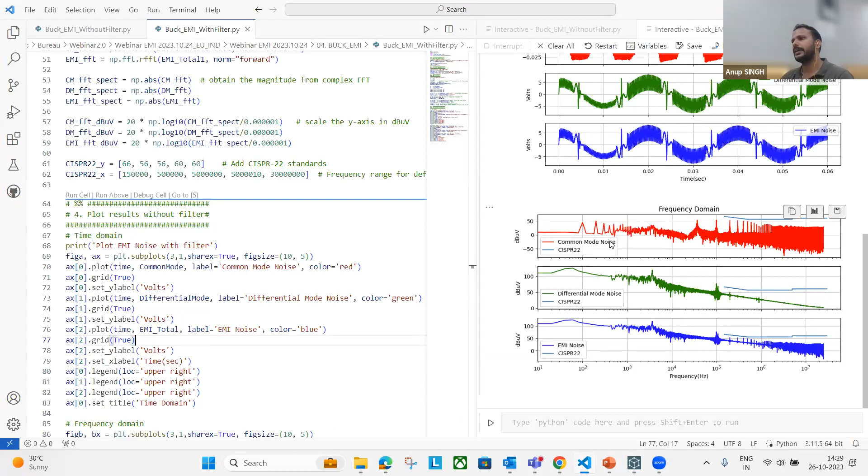Okay, I think yes. Next one.

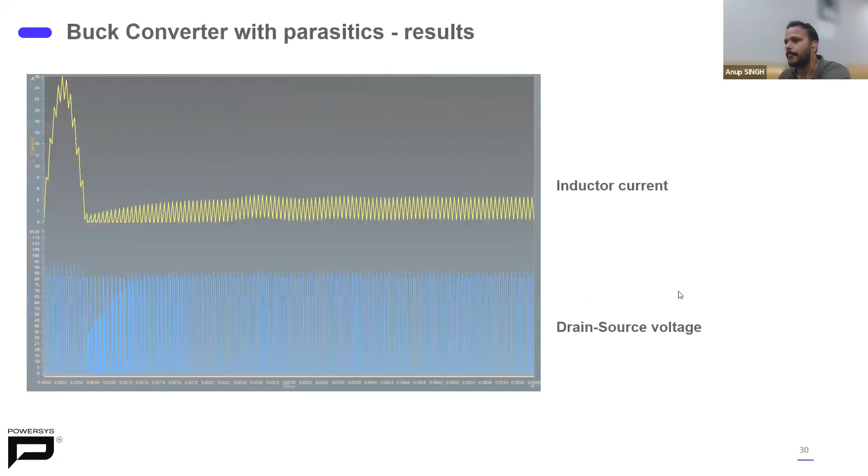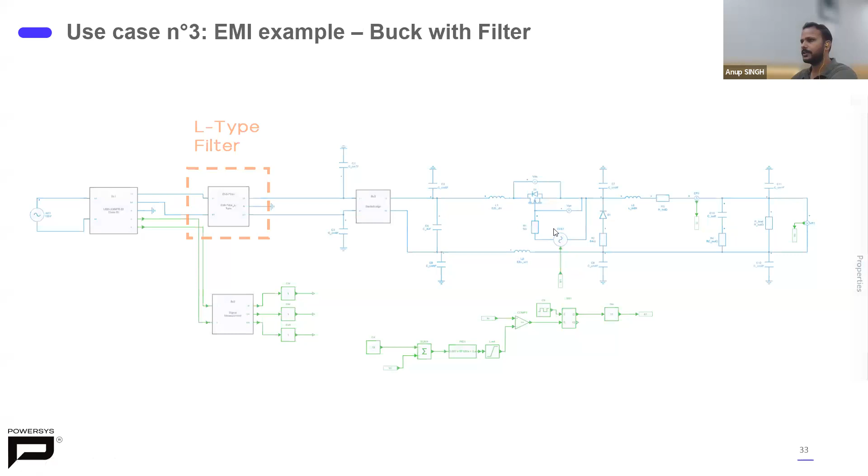We will be adding scopes for VDS, VGS, ID, and instantaneous power to look into it. Okay, not only this, if you have the waveform from this MOSFET model, and you have the ID and VDS curves exactly, then you can get the power losses very accurately. You just integrate the overlapping area between VDS and IDS. The switching losses you'll be able to calculate very accurately. Not only switching losses, the conduction losses also you'll be able to do.

And then capability to import diode, MOSFET, and sub-circuit from SPICE. I have seen some question in the Q&A section. Someone was asking if we can import .subckt from SPICE. As of now, it is not there, but we are doing that. So very soon, maybe in the next 1 month, you'll be able to import all these 3 things from SPICE directly.

And then introduce options to define initial voltage values for CGS and CDS. Sometimes you may need to define these things for your accurate analysis, so this will enable you to do this. And then ability to add extra body diodes, output and transfer characteristics under various temperatures and voltage conditions.

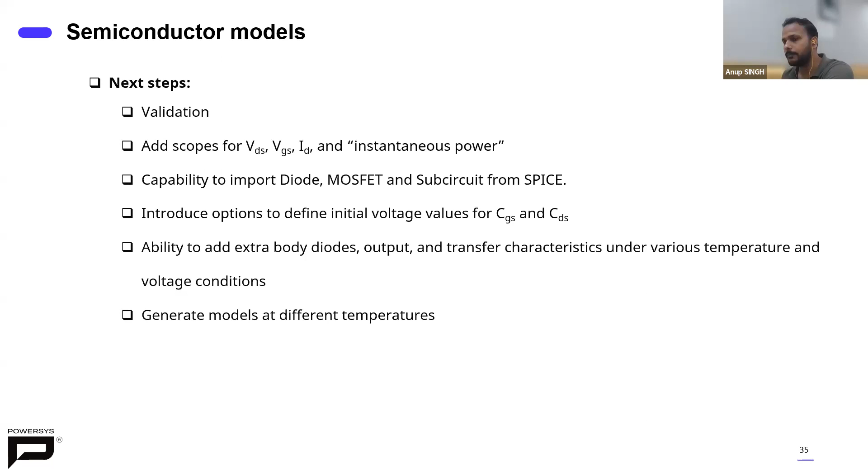So in conclusion, what we have seen is the MOSFET and diode detailed models, which are available for realistic switching transient behavior. So you can do everything in one place. You don't need another solver for your detailed device models. And then the aesim.simba Python library. The Python module allows you to automate your power converter design. There are no limits, anything you can do.

So once you take your power electronic system or design into the Python domain, you can do anything you want with the results, with any logic that you want, any decision making based on the results that you are getting from the power electronic converter or system design.

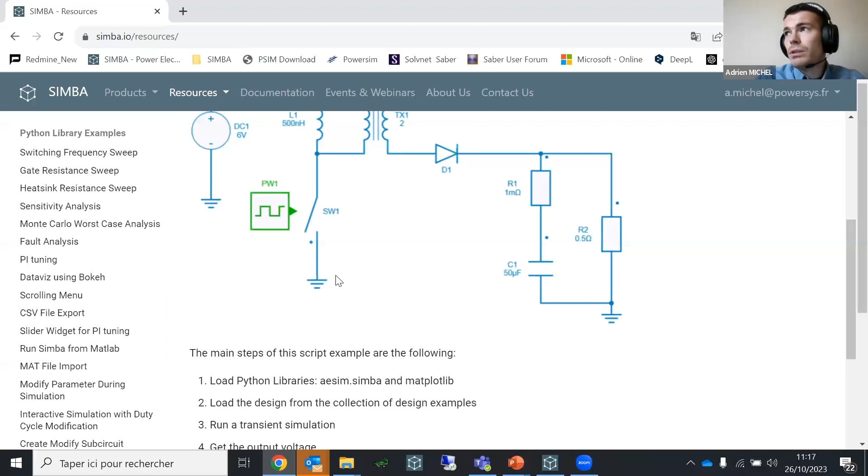So, is it possible to design a three-phase active neutral point clamped inverter in Simba? Yes, it is possible. Any topology, any power converter topology, control design, a detailed level system design, detailed semiconductor model. So anything is possible, except magnetic design and hardware.

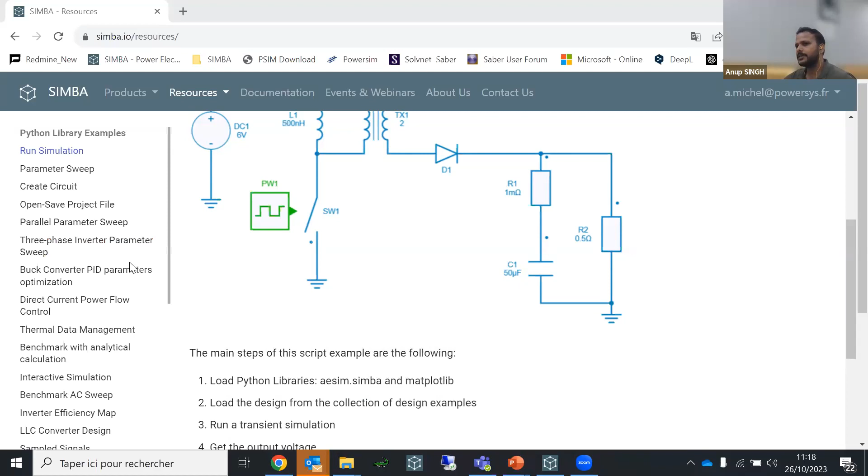Okay, is soft switching possible? Yes. We have an example on an LLC resonant converter, as you can see on the screen, LLC converter design. There we have used soft switching. With the ideal models, you may struggle to find how the soft switching is happening, but with the detailed models, you can definitely replicate that soft switching. You can have access to this LLC resonant converter example. You just replace the devices with your actual devices, and then you can analyze this soft switching behavior. It's possible.

And then, is it possible to perform reliability analysis and lifetime estimation by some pre-built blocks in the simulation software? Reliability analysis and lifetime estimation, as of now, it is not there. But a workaround can be done. Pre-built blocks, as of now, are not there. But if you know the number of cycles, its use cases, and all these things, basically if you know the dynamics, you can implement it. As I said, you can do the post processing of the things that is available in the GUI.

So you can make the system level design, and then the number of times that you want to run it, and how the number of runs is affecting your particular device, and then you can perform the reliability analysis, because for each device there will be some lifetime prediction. So at that level you can do that. The workaround is possible, but directly built-in blocks are not there.